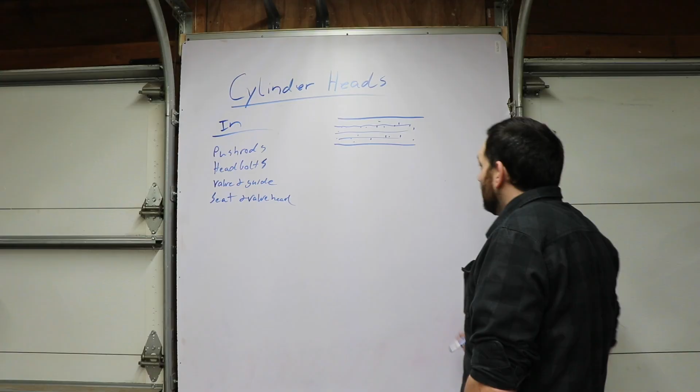But that's not how it's moving through our cylinder head. We've got all this stuff in the way. And in most cases, we've got a cylinder head that at the bare minimum needs to make a corner. It may not be completely 90 degrees, but the air, because it has mass, wants to crash into the back wall.

And the whole thing about me saying mass is inertia. An object in motion wants to stay in motion. The same thing applies to air, even though it's so thin you can swing your arm through it and hardly feel it.

But we're not talking about it as ambient when it's in an engine. When it's in an engine or flowing through an engine, because an engine is just a big air pump, it's moving very fast. And it's not just moving in one direction, because we've got a valve in here that's opening and closing. It's actually stopping flow and then letting it flow, and stopping flow and letting it flow. Well, all that air is moving and it hits the back of the valve and bounces off. So air isn't moving in a straight line through a tube as it goes through an engine.

It's actually moving forward and then backwards a little bit, and then forward and then backwards a little bit, and then forward. So basically, if you know electricity, direct current would be a straight line, but this back and forth that we're creating with the air pulses as air moves through an engine is more like AC current, because it's going in both directions.

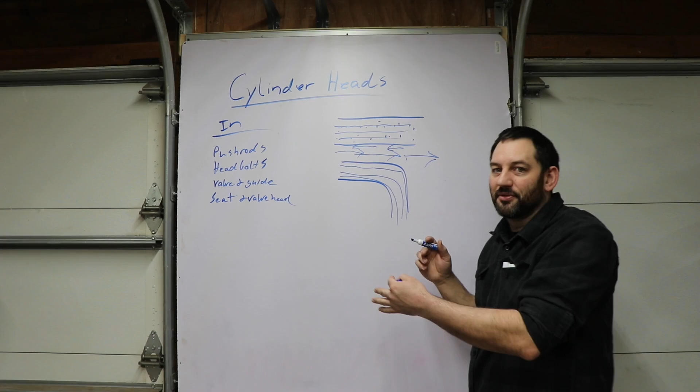We'll get into more of that in the technical side of it when we start talking about intake manifolds and some of the cylinder head porting classes and stuff like that. But it's something to bear in mind, that it's not just air going into an engine. There's everything all the way back to your throttle blade that matters about how this air acts as it's getting through your cylinder head. It's a little off topic, but it's something to be aware of.

Now in our example here, where we're turning the corner, we've got our fuel in here, but if this corner, aka the cylinder head, that's what's making it turn, is the shape of the cylinder head around here, isn't a good design, this fuel doesn't stay in suspension. And if it's way too fast, it'll actually just throw all the fuel against the backside and it'll puddle and turn back into a liquid instead of being atomized and just run to the cylinder.

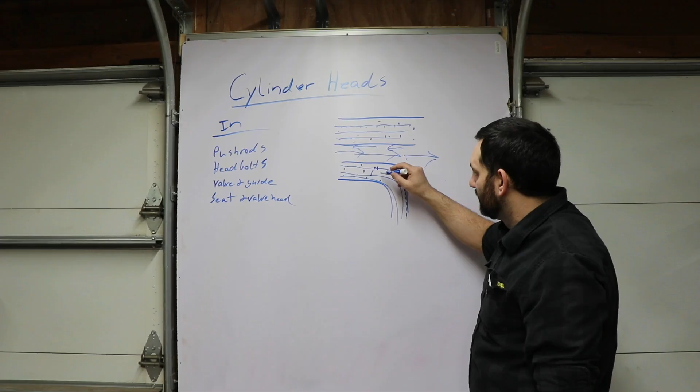The same thing can happen if it's too slow and it just falls out and dribbles down wherever. So we need to have a cylinder head design where everything stays as nice and atomized as possible to get it into our cylinder fully atomized and ready to burn.

Now with all these things in the way, if we've got our push rod holes, a head bolt hole, and finally getting to our valve, we need to have a port that gets through there. If we're looking at it from the top, we've got a pinch point here at our push rod that then has to negotiate around a head bolt hole and be able to get a port that gets to our valve. This is where these things being in the way comes into play.

Because now we're not only negotiating just a single turn from flange to cylinder, we're also adding several more turns depending on the cylinder head just to get the air to the valve, much less in the cylinder. And the more it turns, the lower the quality of the air getting to the cylinder is when there's more turns.

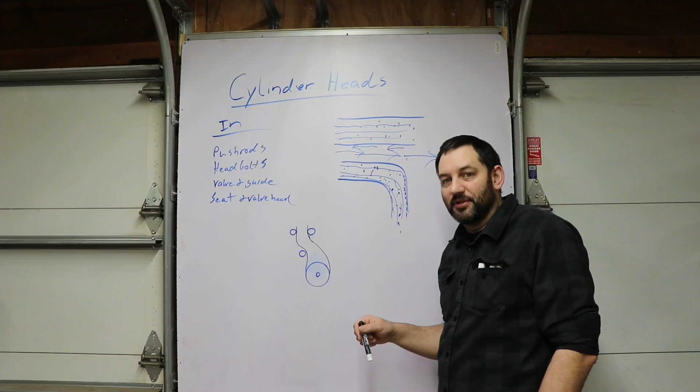It's not that it's bad, it's just that it's not as good as it could be because of your fuel being in there along with the air, and every time it turns, that's more opportunity for the fuel to fall out of suspension, or it slows down the air and it just doesn't end up being as good as it could be.

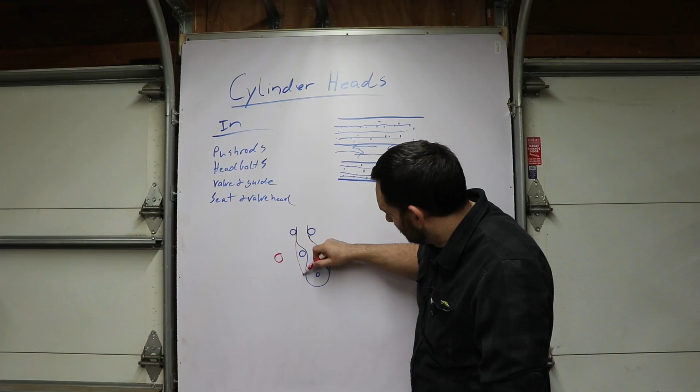For an example with what I just drew right here, if we had a port where, say, we didn't need to worry about this head bolt hole, let's say the head bolt holes were here and here, well, even if the push rod doesn't change, look how much straighter of a port we can suddenly make because that head bolt hole isn't there. The quality of air you're going to be able to get is going to be much higher, provided that the port that's actually in the cylinder head is of a good design.

But that's kind of the point, is that cylinder head designs are all different. They come in all shapes, sizes, flavors, all kinds of whatever. Especially in say a typical small block Chevy application, there's such a gigantic range of styles of cylinder heads to choose from that depending on your power goals, this is the type of stuff to start looking at.

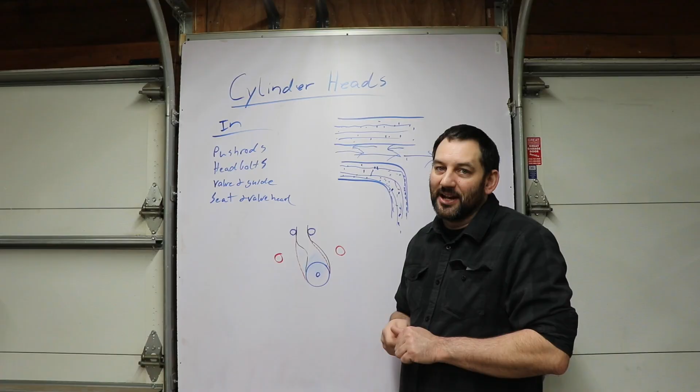Because as you move from an OEM cylinder head or even an OEM based design cylinder head into all of the aftermarket options, all of those aftermarket options are working towards making this air and fuel getting to the cylinder better. That's how they're making more power. And the designs can get crazier and crazier as you go, all the way up until it's something that isn't even remotely recognizable as a factory head, just because it's been changed so much in order to improve the quality of air getting to the cylinder.

Now take note that I keep saying the quality of the air getting to the cylinder. And that is because I'm not talking about raw airflow. Like the CFM that a head flows is not what we're talking about here. We're talking about the quality of the air. And that is referring to, we want the air to not be turbulent.

We want to make sure our fuel is fully atomized, or as close to it as we can get. And we don't want the air doing anything funky along the way inside of the cylinder head port or after it gets into the chamber. We want nice, smooth, consistent airflow, which is high quality air. If it's tumbling and doing all kinds of funky things, that's not high quality air getting in. So I just want to make that distinction, that it is different.

Now, if we're gonna compare some cylinder heads, like say you just got your catalog open looking at cylinder heads, most of the time they're gonna list it by intake CC. And what that's referring to is the cubic centimeters of displacement that the intake port is in size. This is really kind of a terrible way to compare cylinder heads unless they're all of the same design. Then it's a pretty decent way to tell the size of the cylinder head port.

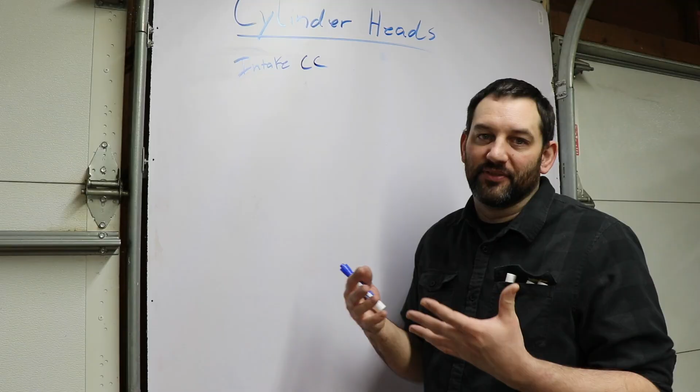What I mean by that is, let's say we've got a 23-degree typical small block Chevy. Well, if we're looking at a 185, a 195, a 200, a 215, we can pretty much easily go with the idea that the 185 is a pretty small port. It'll be good for a smaller engine or building torque on a larger engine at lower RPM.

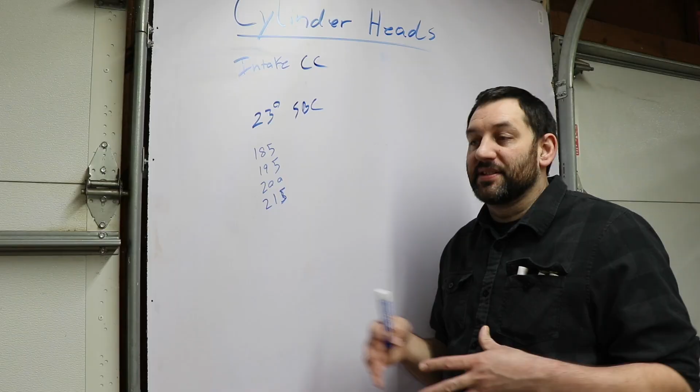And as we move up in port size, that port's going to get bigger, it's going to flow more air, but if we're not changing the size of our engine, the air is going to be flowing slower or have less pull on it because of the size of our engine. So if we're using our small port on a large engine, the engine's going to be making a bigger pull. That's going to have good high airspeed on a small port. It's going to make torque and it's going to make it at a lower RPM.

If we've got a small engine with the big cylinder head, so the complete opposite, it's making a small pull, which is not going to make a lot of airspeed, especially on a big port, until it gets high up in the RPM range to start making enough pull or pumping forces, because the engine's an air pump, to move enough air to create good airspeed in the cylinder head.

Now, this is important to understand because air has kind of a speed limit that it can get up against. It'll only go so fast, and then same thing with our atomized fuel being in there. There's a point where you need it fast enough to keep the fuel atomized, but then going too fast can also make the fuel fall out of suspension, because now it's got so much speed that we're literally just throwing it against the port wall when we try to make it go around a corner.

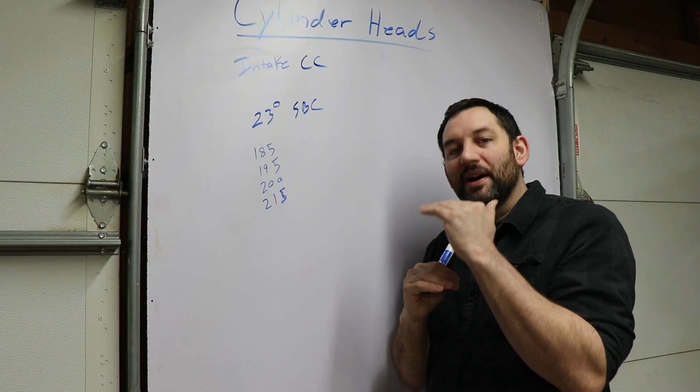And there's a sweet spot in there where heads make great power, regardless of what they're on, provided they're designed properly around your engine build. They'll make good power almost everywhere, kind of a thing. And it's hard to get in, say, an off-the-shelf as-cast situation. You either gotta have a ported cylinder head or something that's CNC'd, or just a head that's a really, really good design right off the bat in order to accomplish that.

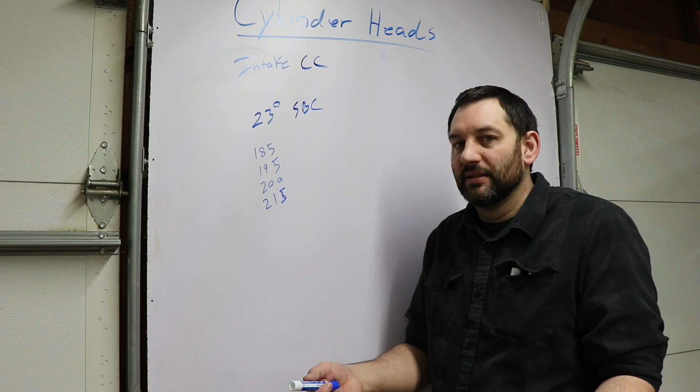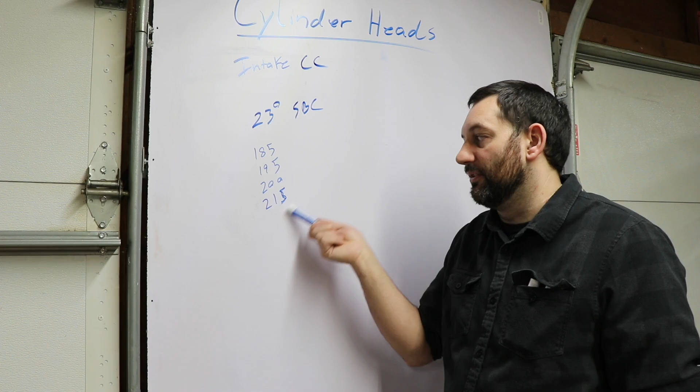But that's why cylinder head porting exists, is to alter the shape to help the air flow through the head past all of our restrictions and around the corners it needs to make. Getting back to port size here though, as long as we're comparing 23-degree heads that are all for the same application, this is an okay comparison using the intake CC. Just out of generalization, these are probably going to be as-cast sizes. Getting to a 215 might start to be a CNC'd port, where they started with the 185 head and then CNC'd it, and now the shape that they made is displacing 215 cc's.

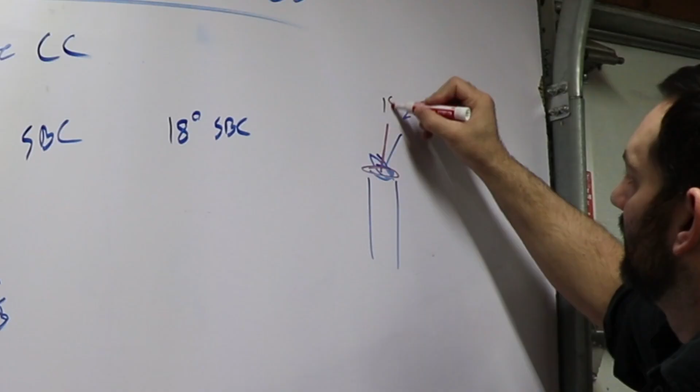The bad part is now if we're going to get into trying to compare it to, say, an 18-degree small block Chevy head, because this degree difference is referring to the valve angle. So our cylinder is straight up and down. We got our valve coming in at an angle. So a typical small block Chevy, that is 23 degrees. Now you go to an aftermarket head of an 18, and now that valve's a little flatter, and now it's at an 18-degree angle. And there's even lower angle numbers than this.

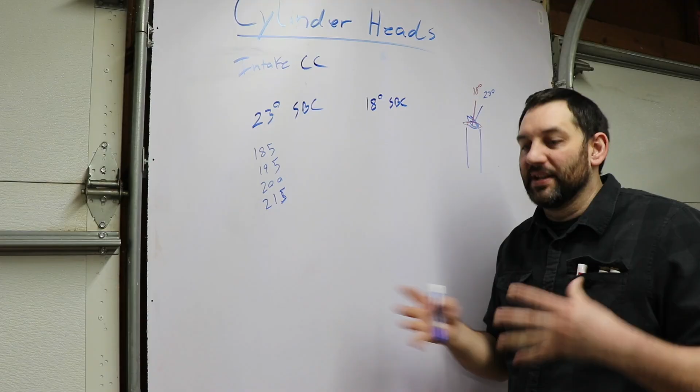The reasoning for that is they're changing the angle of the head because they're trying to work with the combustion chamber size to make it smaller. That's when you start getting into really high performance heads, where nothing other than your bolt holes and your push rods, and even the push rods are movable, is like everything's negotiable at that point as far as what is able to be moved around to improve a cylinder head.

But with the port CCs here, probably, because we're talking a high performance head here, this is probably going to start at say a 215, and have a 230, and maybe a 250, or whatever in port sizes. The actual numbers are not important for this discussion.

But this 215 and that 215 are not equal to each other. Not even close. So you can't compare this 215cc head to this 215cc head in terms of, oh, they're going to be exactly the same. No, they will not be the same. They're not even going to be close, because this head probably has a whole lot more done to it.

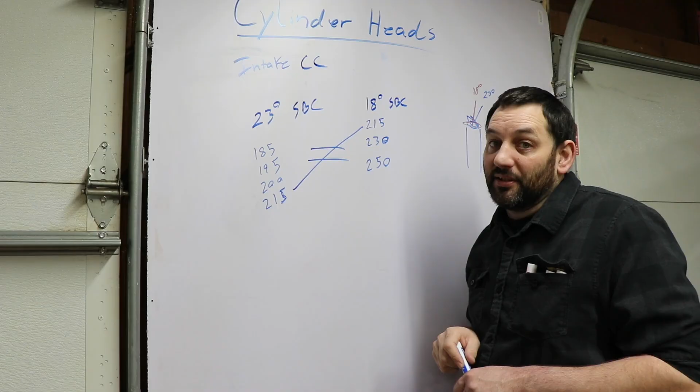It might have offset push rods. It probably has a smaller chamber. It most likely has a raised runner, which, you know, if we're talking, we've got our chamber and our valve coming off, and we get our port drawn in here over to the intake flange.

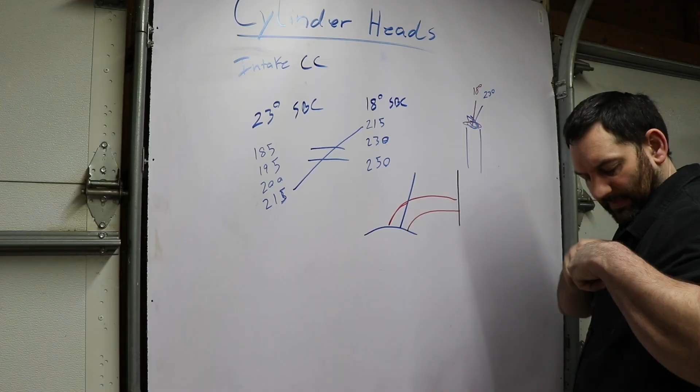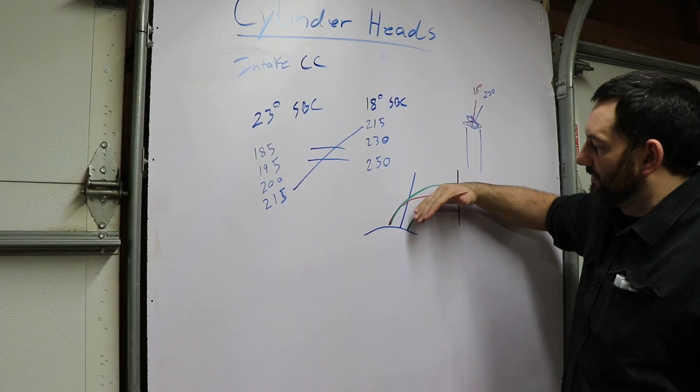Now you might have a typical port that's going to be kind of some shape like that, but a raised runner port is going to be moving that intake runner opening at the intake flange up. And even if the valve angle doesn't change or anything else like that, you can see we've reduced the amount of turn in the cylinder head.

So even if these two ports are the same size, the air quality being flowed through them is going to be different. And because this one is up higher, it's automatically going to make our raised runner bigger.

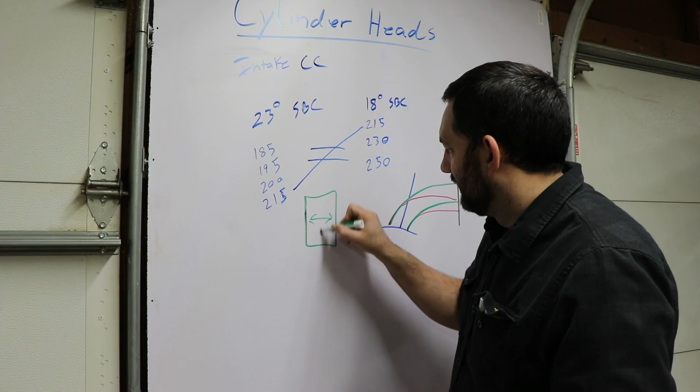So really, if we look at the cross section, being if you're looking at it from the intake flange, is the area of the inside of this port. So if we got 1 by 2, we've got 2 square inches. I think that would be our cross section.

And if our two ports are the same size, the cross section won't be the same between them, because some distance or volume needs to be taken up with this port being raised. So the cross section of that raised port is going to be smaller, and that's going to make the airspeed higher in it, which is actually going to act a little bit more like one of these smaller heads.

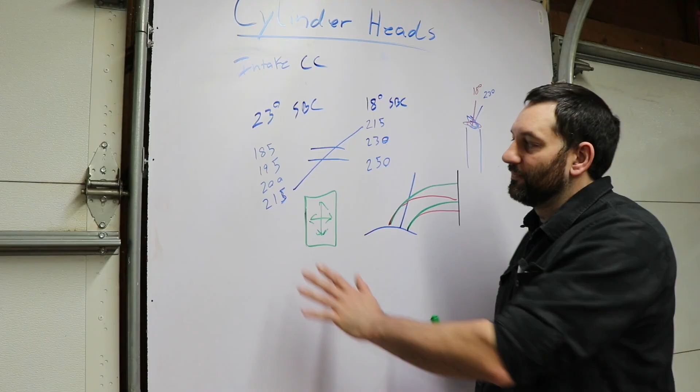So really the point here is that this is not an apples to apples comparison. You can use it for a base level comparison as long as the cylinder head type is exactly the same.

Now I could keep diving into the shape of the intake port and all that stuff, but for 95% of you, it's not going to be an important thing, because you're going to have an engine and it's like, this is the type of cylinder head that we have to work with, and you're not going to be able to kind of go a la carte with the cylinder head and pick and choose every little detail about it. A good example of that: anybody building something for the street, typically even on the small block Chevy side, you've got all those race head options, but you're probably going to end up just picking a 23-degree head anyway, because there's a lot of really good options out there, and you don't need a full-on custom race head for a street application.

We will be getting into more of the technical side of that stuff in some of the cylinder head porting videos that'll be coming up. I don't want to turn this into a 3-hour video.

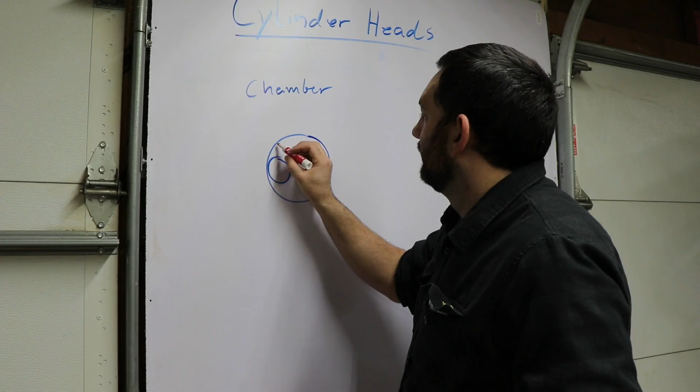So once our air gets to our chamber, we've got several different ways that the chamber can be designed. It could just be a big open bowl with a couple of valves in it. We could have something that just has a couple of flats. All the way to having our kidney bean or peanut shape in there, where we've got material added in to try to make as small of a chamber as possible.

And a lot of that is just going to be based around what fits, what works, and the chamber size that we're shooting for, because a smaller chamber—again, it's measured in cc's—a small chamber is going to be higher compression, because as the piston comes up, you're squeezing that air into a smaller space. And an open chamber is going to be lower compression.

Really, the shape is less about performance and more about making the compression ratio you want for that engine. You could buy, for example, a 75cc chamber, that's a fairly big one, or you could buy a 64cc chamber, which would be making it smaller, making higher compression. Sometimes that's determined with the head, and a lot of times it's also determined with the piston, because we'll use the cylinder head to make our airflow better in a performance application.

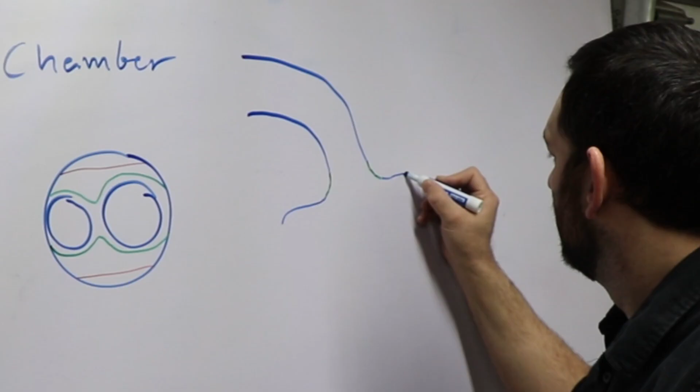Where that comes into play is when we start talking about how the air is coming out of our port and into our chamber. So if we've got our port, and then we're going to have our valve seat. And if we just have a really flat chamber, this would be a typical small block Chevy where it's got a lot more chamber on one side. That's due to the valve angle, like we were talking about earlier. So the more that this valve gets stood up, the smaller the space can be made over here.

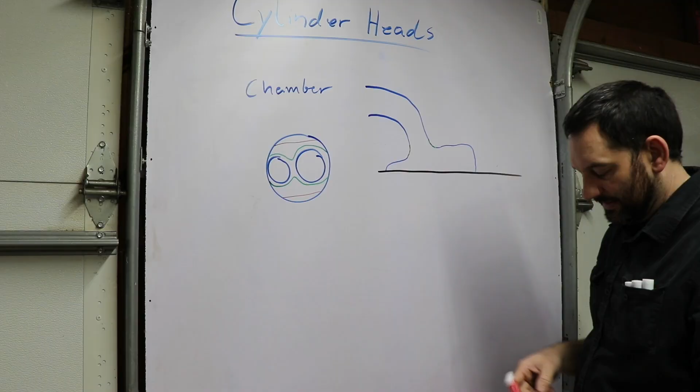Now when you get into performance applications, this air, like I said, doesn't want to turn corners, so it's got to turn a lot to try to fill in these areas. And that can cause turbulence where the air starts coming in, and it's so far that it kind of ends up being turbulent just to fill those areas.

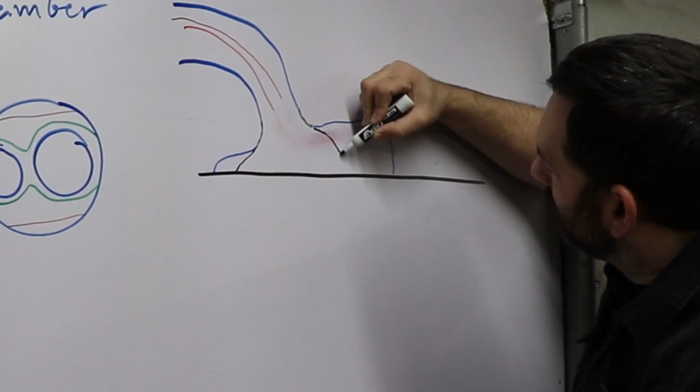Now in order to fix that, some cylinder heads will change the shape. Where we come off our seat, our chamber starts looking like that, where now we've eliminated all of this void over here, and the chamber is a lot smaller. So this would be getting into our peanut, kidney bean shape.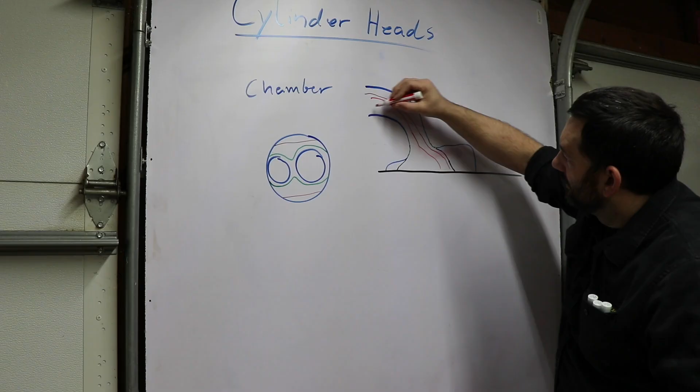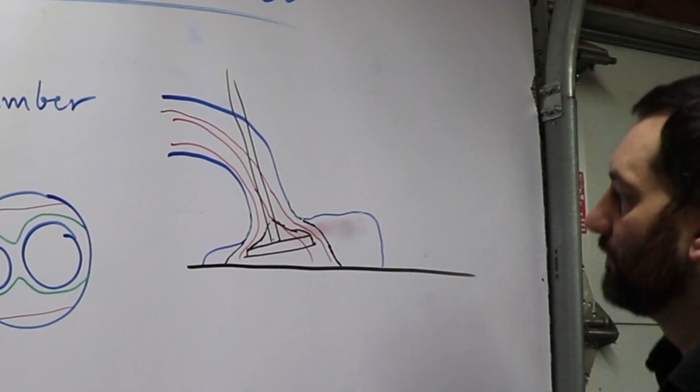And now when our air comes into the cylinder, it is supported the whole way, so it can flow nice and smooth around the valve. Because yes, we still have our valve in here, so it's got to get around. Same thing, the back of the valve is shaped in a way to support that air also, where it'll flow nice and smooth around each side. So with all of those things, we're improving the quality of the air.

The other thing is, as we're transitioning from this super flat to this steeper edge along the valve, our valve angle, or valve seat angle, can get steeper. So 45 is the typical all-arounder valve seat angle. That'd be where it seats on this valve against the head.

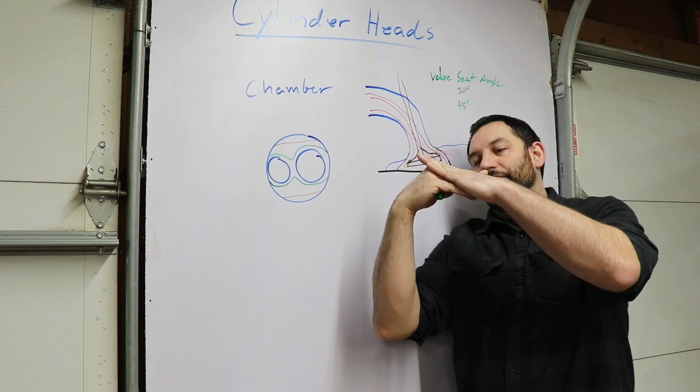Now, when you've got a super flat style chamber, typically a 30-degree seat might be better set up for that head. Some OEMs ran 30-degree intake seats back in the day, and the 30-degree seat makes more airflow at a lower valve lift because at the flatter angle, for a given amount of valve lift, the space in between is greater.

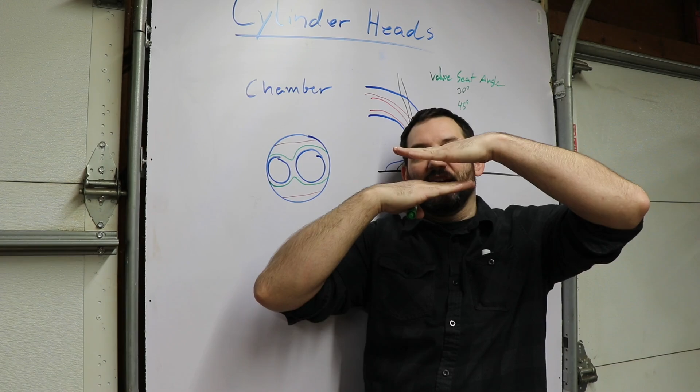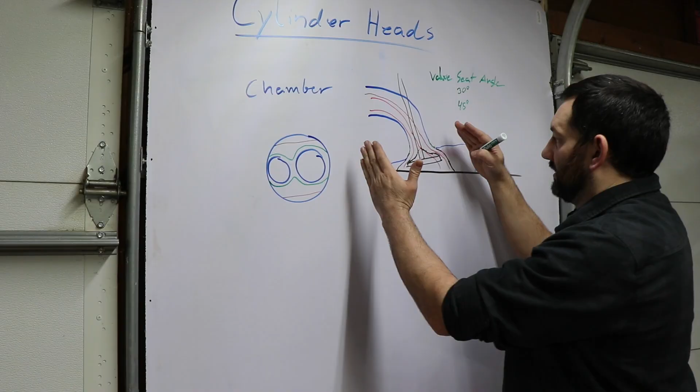And I know that sounds weird because, well, if it's lifting 100 thou, it's lifting 100 thou. Yes, but if you're looking flat to flat and we lift 100 thou, we've got 100 thou of space. But if we're at 45 and we lift 100 thou, we've got 100 thou between here, but that doesn't mean we've got 100 thou between everything else, because we've got the port, the chamber, the valve, and everything else in the way. The valve didn't just magically shrink 100 thou all the way around. It only went in a linear direction.

So you can flow more air with a smaller seat angle at low valve lifts. The problem is by the time you hit a quarter inch, or 250 lift, it stops being better, and a 45 will start to flow more air than the 30 at a higher valve lift, because the angle is softer and it's making that air turn less.

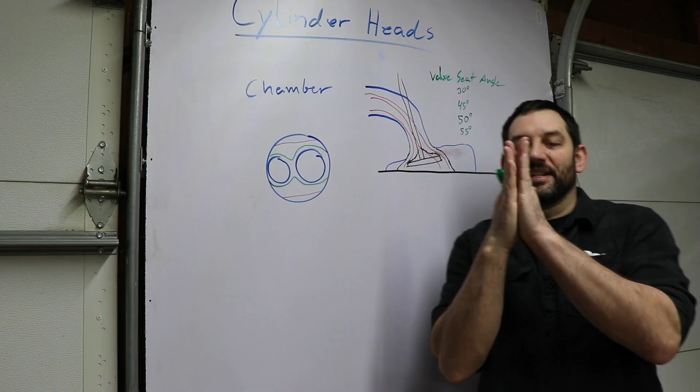That being said, the farther we go with using our chamber to support our airflow, we start getting into where a 50-degree seat might be a good option, especially if we're talking high valve lifts. I haven't personally used one, but I have seen seat cutters for a 55, and I think that's kind of about maxed out, because you also get to the point where if it's too steep, if it was 90 degrees, you're not sealing anything with the valve because it can't put any pressure on. So this is kind of an upper limit. It's definitely not very common to go past 50.

But the 50 also gives up more at the lower lifts. So if we just had a stock cam in something where we see 450 of valve lift,

a 50-degree seat is not a good option for that, because it's only going to start trying to work above that. A 30-degree would probably be pretty decent. It's just, you're also talking a really bad port design where everything's really sharp corners and the air has to slow down a lot so that it can turn around all those corners.

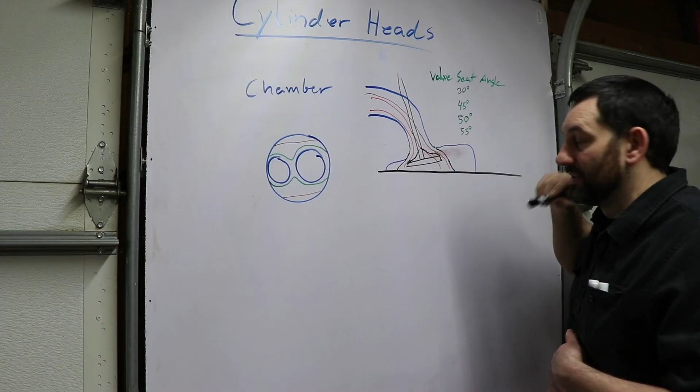45 is kind of the go-to all-arounder, because it doesn't give up a whole lot compared to the 30 at low lift, and it doesn't fall on its face at high lift like the 30 does. A 45-degree seat angle is what almost every head's really going to come with, unless you're talking about a much higher end race style head.

Now, much like the ports themselves, with the chamber, it's kind of sky's the limit. You can do a little bit of anything and everything if you're blank sheet on a head.

So instead of our valve seat being here, we can cut it deeper into the head. That moves our valves up, adding cc to the chamber, because your valve height absolutely has a big effect on that.

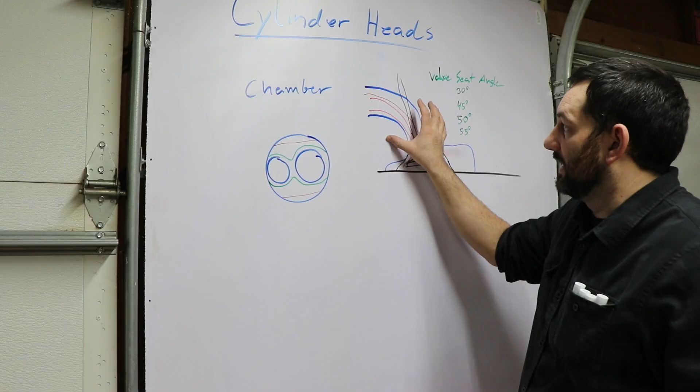Or we go to a closed chamber style head, but if we're already talking a raised runner head, perhaps we need to meet the same compression ratio, so the entire thing got moved deeper into the head and the port went up with it, in which case now we've got a larger volume out here, even though we've got a closed chamber head with our tighter shape. You know, everything can change a little bit.

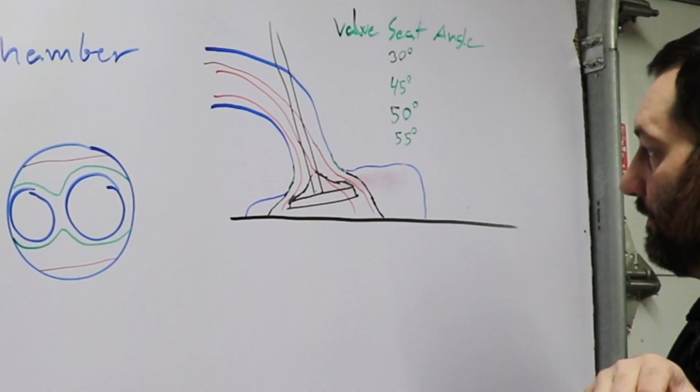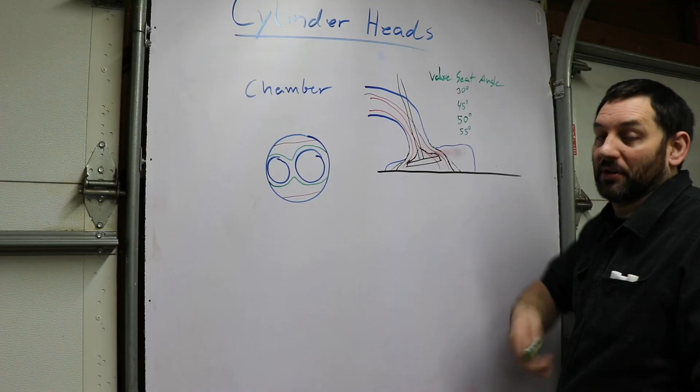It can also, well, if we need to lower compression ratio, but we've got a closed chamber head with this tight support area, well, we could come back and lay this chamber back a little bit more, just to add a little more cc if need be, and that can be done with just porting techniques and grinding on the cylinder head or getting it CNC'd to a different shape.

Anything and everything can be changed here and adjusted, and it's just whether or not you want to get into that much nitty-gritty of it, or if you're buying an aftermarket head anyway, just pick the right one for the application. I can't tell you what's the right answer for that, because it's going to be a little bit different for every type of engine build.

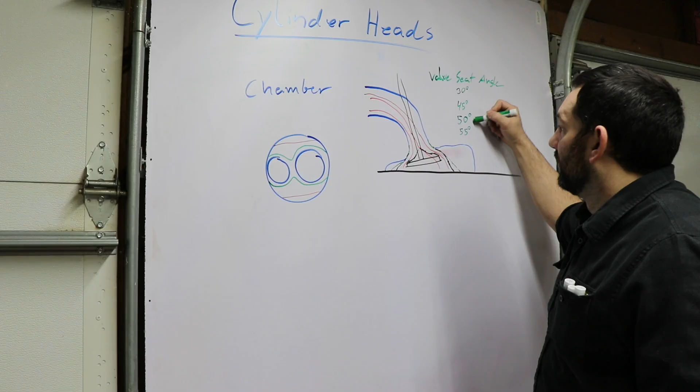But if we're talking high performance engine build, which is why you're watching this video, we're gonna want to stay away from a big wide open chamber unless we have to for the compression ratio. We're gonna want to have more of a closed kidney bean shaped chamber if we can, and that'll get us that airflow support we're after for having either a 45 or maybe even a 50-degree valve seat angle, so that we know we have a good port, we've got a good chamber, it's just a good cylinder head all around to make higher compression, large cams, big intakes all work together.

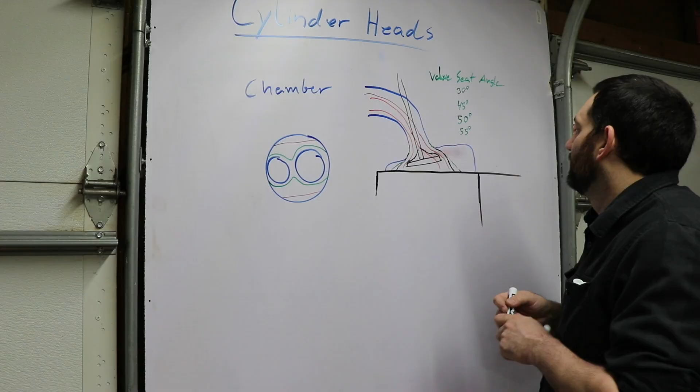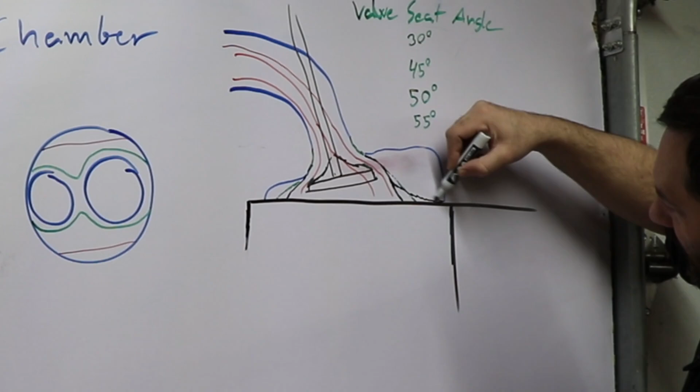For the nitrous guys, there's something that, if needed, can be done, and that is chamber softening, where we actually turn it into an open chamber, but we're not doing it like this. We're keeping a lot of our shape, but then we'll lay this edge back on both sides, and that's just to eliminate the sharp corner on each end where our chamber meets the deck, because all of this otherwise should be flat area.

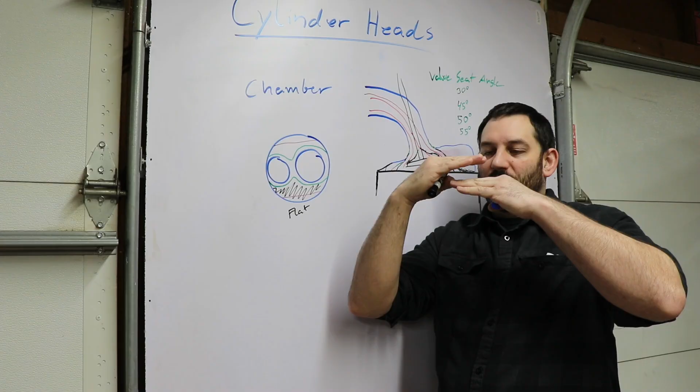And it's flat because where the flats meet up with our piston when it comes up is called quench. When the engine is running, that becomes a very, very small gap. And the idea here is that we're making it so small that the air and fuel has to be thrown back into the center because we're pinching it so tight.

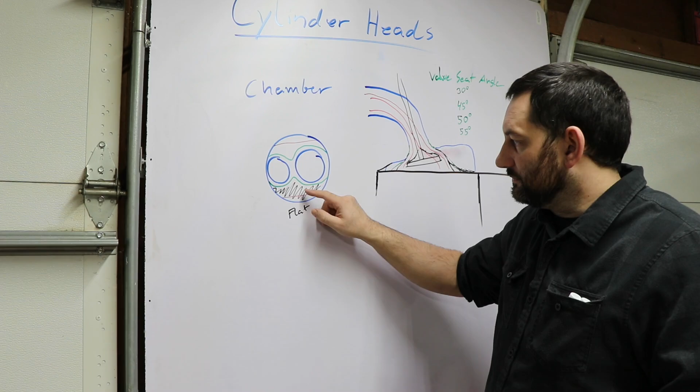In a nitrous application, depending on what air and fuel gets stuck in there, it can make a detonation area if we got a sharp corner. So in some applications where that's needed, we end up doing this chamber softening so that there are no sharp corners, and it all just more can get funneled back into the middle, but then we lose the quench area.

Quench area is really just trying to take that portion of the cylinder and throw everything back in and kind of pretend it's not there, making it seem like the whole thing is just a little bit smaller.

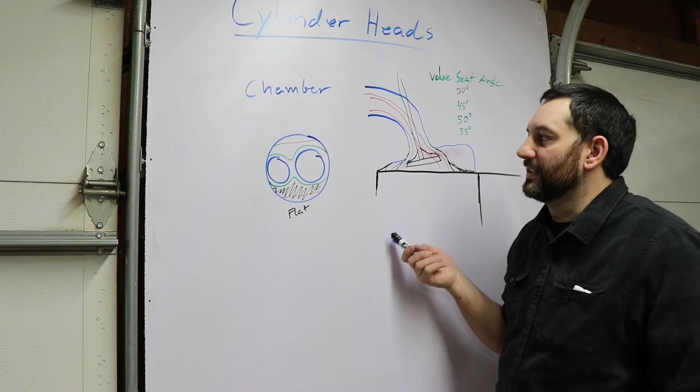There's plenty of discussion and argument about whether you even need it, what size it should be. Honestly, for the average person, you don't really need to worry about it. Just as long as you're not too tight of a gap where you're having contact between the piston and the head. Once it's past a certain point in size of that gap, it just loses a little bit of a benefit. You're not really hurting anything. So really you shouldn't be too worried about any of that, and I've never done any dyno testing where we can go back to back testing the importance and the power production of quench.

Just something to know - most cylinder heads are going to be designed with some type of quench as a factor between the piston and the head, just because they're making the shape to work with the airflow and just leaving everything else flat.

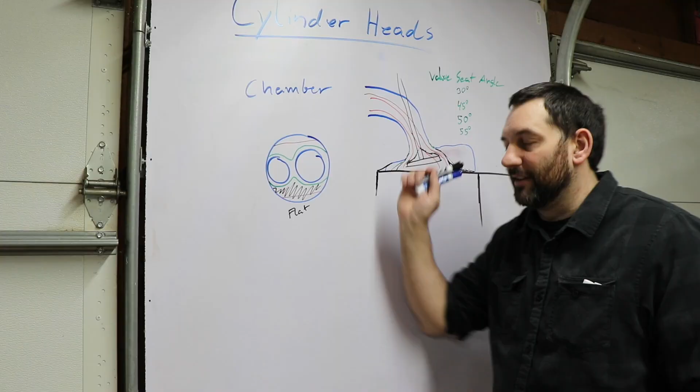Now, I feel like we do need to touch on a Hemi, and I mean a proper old school Hemi, not a newer semi-Hemi. The combustion chamber is legitimately almost a complete upside down bowl shape in a Hemi.

The benefit of which is I can put really big valves in them. Because instead of being limited to just the shape of the circle, they've tipped it back and created enough space to put this very large valve in. It also has a secondary benefit of the ports becoming very straight.

So old school Hemis flow huge amounts of air. That's why they're on all the top fuel dragsters with big blowers, because those guys are at the point in engine building where as much as you can cram in, it'll take.

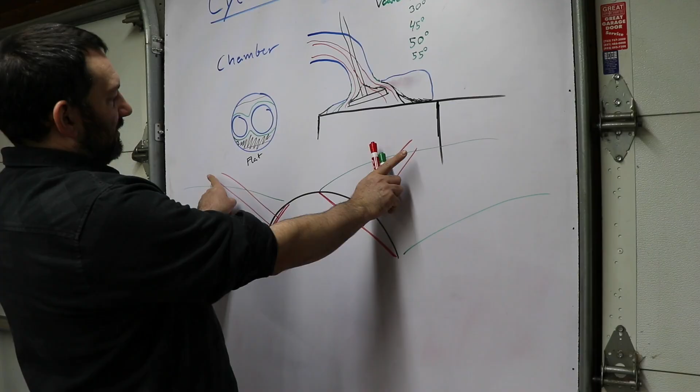The other part is when you look at the way everything's arranged, you start talking about a very wide head, very big rocker arm system to get everything to work. There's a lot of just requirements that go along with the design that make it expensive as well.

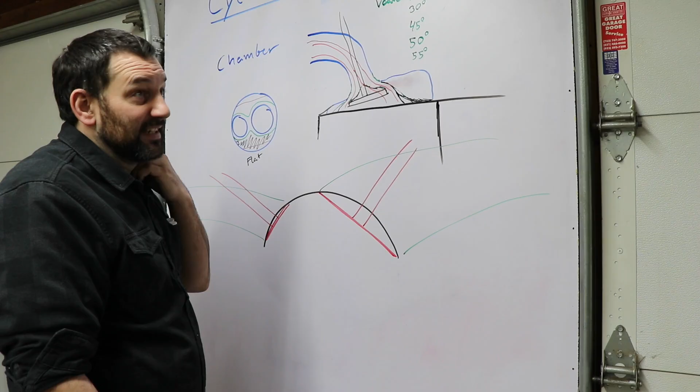If you ever looked at the price of Hemi parts, valve train parts compared to a regular old inline V8, like the rocker arm system is at least 4 times - no, it's got to be more than that - 7-8 times more expensive for rockers, just because of the sheer size of everything. It's just so much bigger.

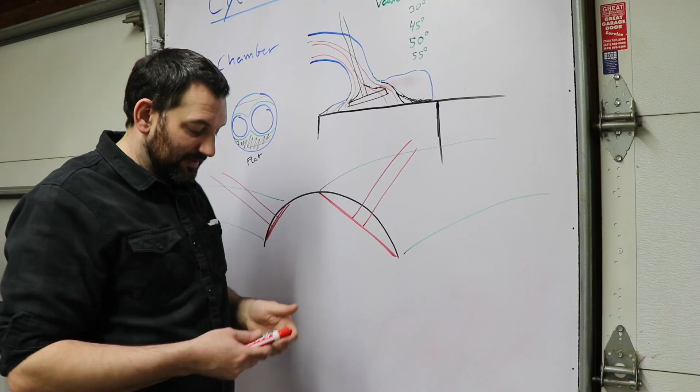Now I bring up the Hemi in this situation because of this super nice port shape. So if you're thinking ahead a little bit, like, well, why don't we just take that port and put it on our inline head? And yeah, that's a great idea, because now we are changing our port into something like that. However, as you can see, we are now way, way higher where our intake manifold begins than we were. So if we're talking about anything that needs hood clearance, it's kind of a, nah, I can't do it.

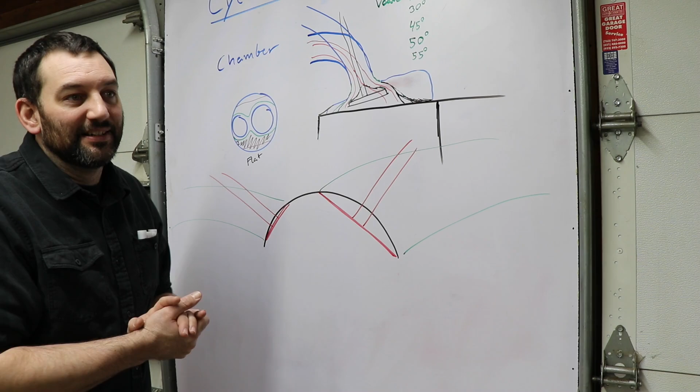I will say the flip side to this is going to be the newer GM LT series. They've got really tall, straight runners. But if you look at that cylinder head compared to an old small block Chevy, they're huge. It's a huge cylinder head compared to a 23-degree small block Chevy head. It is so far different, but it's also very much a high performance, almost race quality level head from the factory right out of the box kind of a thing.

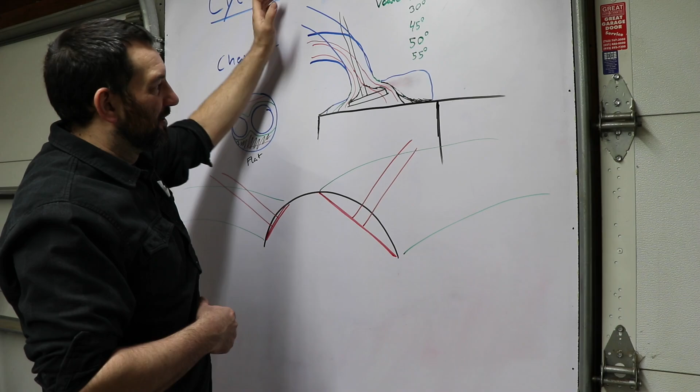It also comes into hood clearance issues, so the intake manifold's got to be a lot different. From what I've seen with a lot of the LT stuff, we're working with superchargers, so the supercharger can be stuck down in there. You can compromise a ton on the intake manifold itself just because you've got a supercharger making boost, and you're forcing the air in. It can be kind of garbage everywhere past here, and as long as this part is pretty good, it'll fix a lot of the air on the way into the cylinder, and it still makes power. But we're talking compromises again.

So how do you choose the right cylinder head for your build? Well, this is one of the things where there's no right answer for everyone, but we can make some generalizations to help us narrow down the window to maybe pick from a few different ones.

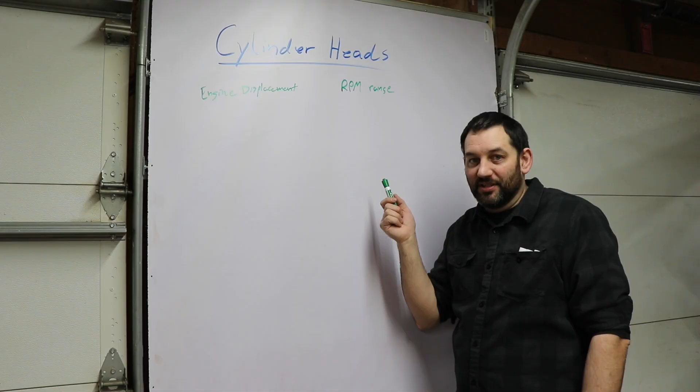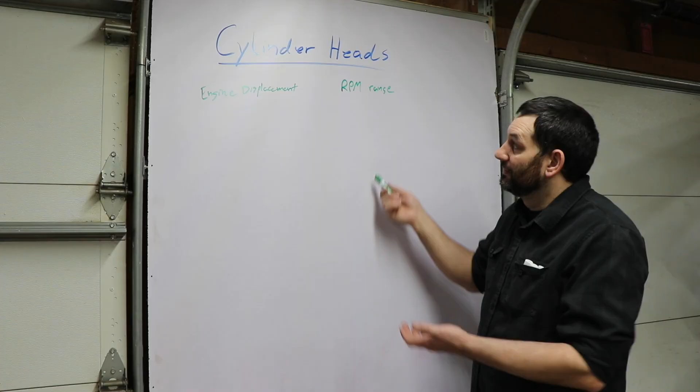What's going to play in is engine displacement. This is going to be the big one, because the bigger the engine, the bigger the cylinder head you can run and still have it work good in a certain RPM range, which leads us to RPM. Are we building a race engine that's going to turn 7,500, 8,000 RPM? Or are we building a street engine that's going to turn 6,000? Are we trying to build a tow rig engine and we don't care what it does above 5,000? That's going to play a big factor, because the race engine versus the tow rig engine are going to be wildly different cylinder head choices.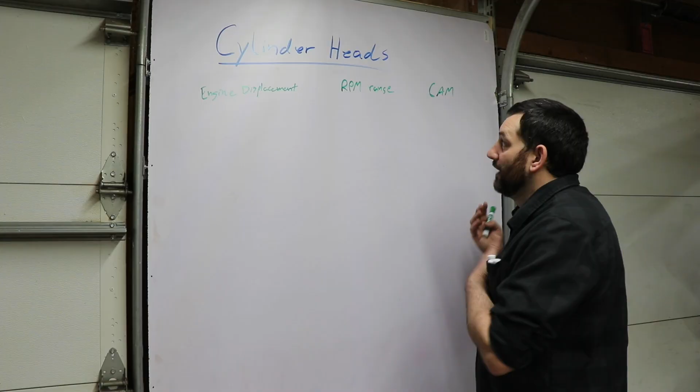And another is our cam. Really the cam and the head should kind of be, I don't know, it's like which one do you put first? I'd say we're probably picking the cylinder head based on our engine displacement and RPM goals, and then we'll pick a cam to go with it, but we can't just pick a cylinder head without thinking about our cam as well.

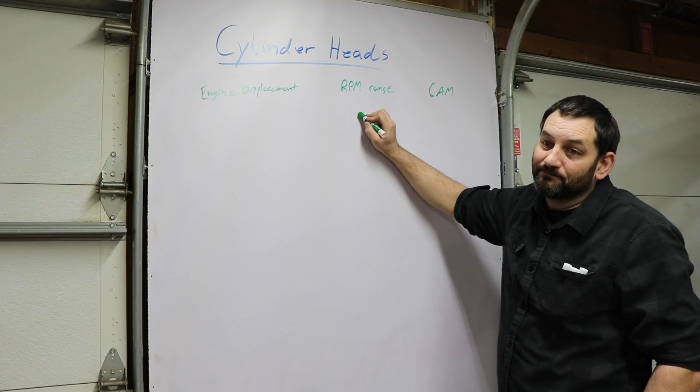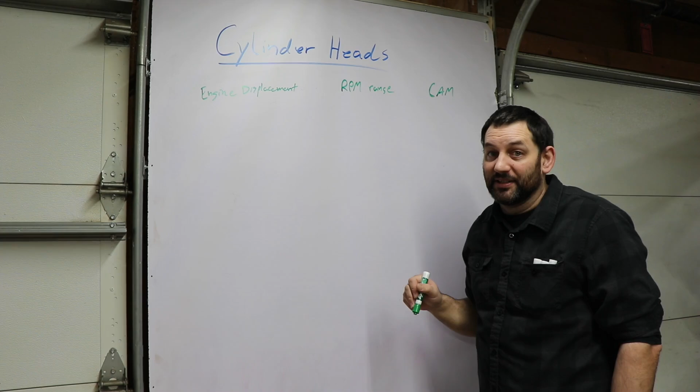Simply because our camshaft might have lift requirements. If we're going for big RPM, there's a lot of different styles of cylinder heads that can get us there, but if we're needing say an 800 lift cam to do it, we're going to need a cylinder head that can actually do 800 worth of lift. Versus if we're doing a street engine and we keep our lift under 600, that's got longevity. Most any cylinder head can be made to handle 600 lift, and we don't have to worry about picking a special head because of the cam requirements.

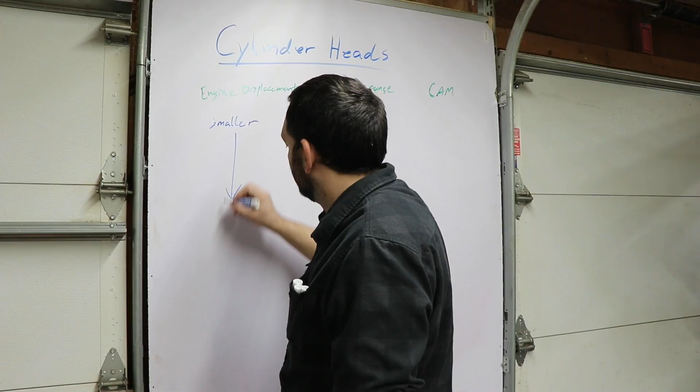Now when it comes to the engine displacement, we're smaller to larger. That's kind of going to be in line with the port sizing of our cylinder head. I say port sizing because it doesn't matter the actual physical cylinder head size or design, it's going to come down to port sizing. Like we touched on earlier, smaller engine displacement has less of a pull, bigger engine's going to have a bigger pull. So a bigger pull can make use of a larger cylinder head port and get the airspeed into the window where it's good at making power.

That gets us to our RPM, so a low to high RPM, kind of the same thing. The lower the RPM range, the smaller the cylinder head port size we're going to want to work with. The higher the RPM, we can use a larger port, but if we have a small engine and high RPM, we still don't want to go with a giant port, because we're probably never going to actually reach the RPM where we'll get our small engine to make enough airflow to get the airspeed into the good window in the cylinder head.

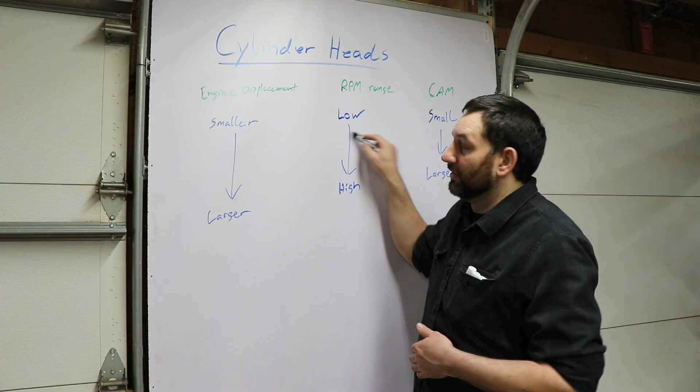And I could get away with a little more camshaft to cheat the power up a bit, even though I don't necessarily have the cylinder head to go to high RPM. But since I'm building a street engine and I'm okay with a lower RPM setup, I can put a little more cam at it. Even though the cam will be limited by the cylinder head and we won't make more RPM, we'll still add some airflow and build more power in the mid-range.

Flip side of that would be building a small block Chevy, where we've got any cylinder head possible to choose from. Really, it comes down to goals and budget, just like we talked about in the very first introductory class video.

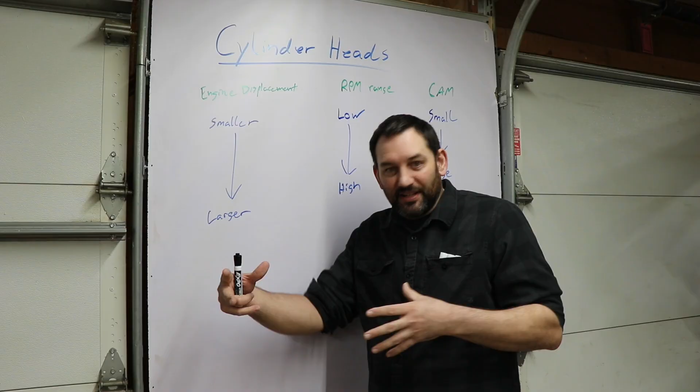If you want to make 500 horsepower, you can do that with a 23 degree head, an 18 degree head, a 14 degree head, a bore-rotated splayed valve race head — anything is capable of it at that point. But the 23 degree head is the budget option, and there are a ton of options even within that category.

Then you come down to: what engine size are we going to do that with? Because 500 horse is pretty easy to do. We could do that with a 327, or we could do it with a 427. The 427 will obviously do it much easier because of the additional displacement.

And they could even probably have the same camshaft at that point in time. It's just because our cam is going to act bigger on the smaller engine and it's going to act smaller on the larger engine. But between the cylinder head and the cam, airflow wise, we're getting to that point where we can make that power, and the engine displacement at that point is just deciding at what RPM we're doing it.

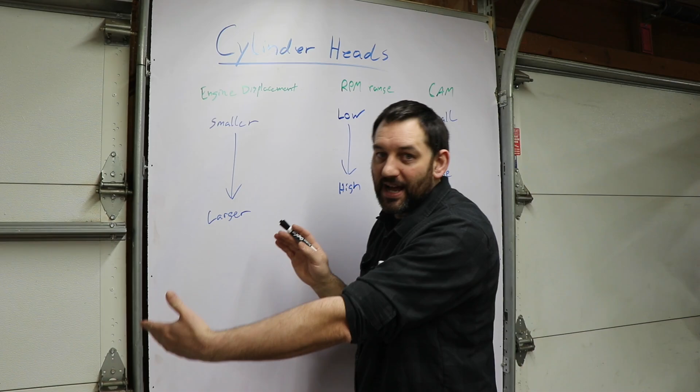But we've got our smaller engine and we don't have the big displacement to lean on or use as kind of a cheat code, then we need to make sure that we're not picking a giant cylinder head to go with it. That's only going to start making power on that little engine at a high RPM, because that's not where we're actually wanting to use the engine. So we're going to need to pick on the smaller side of cylinder head to go with our smaller engine.

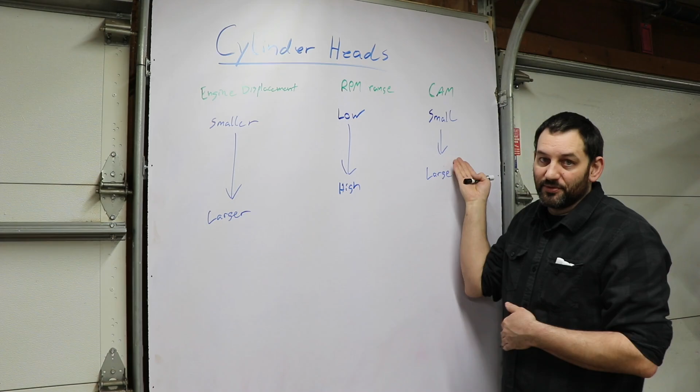And if we've got those two things lined up pretty well, we can actually cheat up our power a little bit by putting a larger cam in it, because we're getting that cylinder head into our airspeed range for our smaller engine in the RPM window we want. And then therefore we can use our cam to cheat up the amount of air getting into the engine and make a little more mid-range and top-end power, even though we've kind of compromised a little bit.

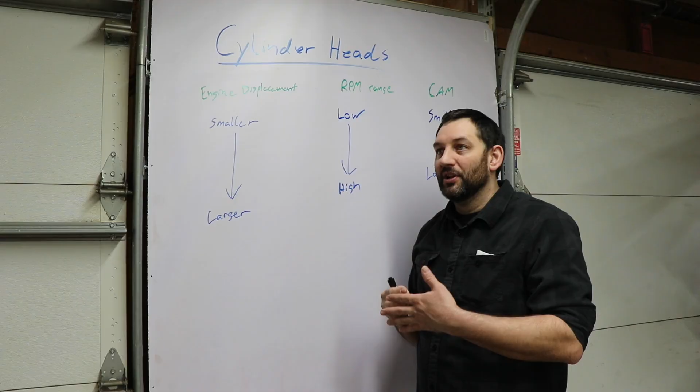But we didn't compromise, because we picked things that worked together, and therefore the engine will perform in a way that's kind of a little bit above and beyond, or hitting a little bit above its weight class, just because we're making all the parts work together.

Once again, we're going to dive way more into the nitty-gritty of cylinder heads when we get into the porting videos. I don't want this to be a 4 or 5 hour video, because there's going to be so much discussion on the little nitty-gritty bits of a cylinder head, and I wanted this to be more of a generalization for cylinder heads and choosing them, because we're going to get into intake manifolds and headers.

And I think at the end of that video, we're going to kind of tie everything back in, because your induction system, which would be everything from the throttle body or throttle blade in the carburetor to the cylinder, is your induction side. And then we've got the exhaust side, which is going to be everything from the cylinder out the tailpipe, so to speak.

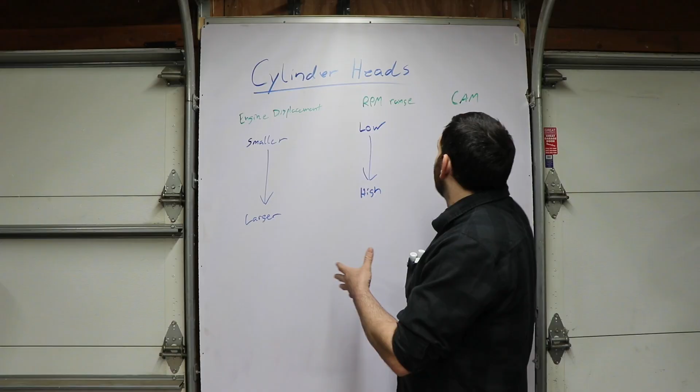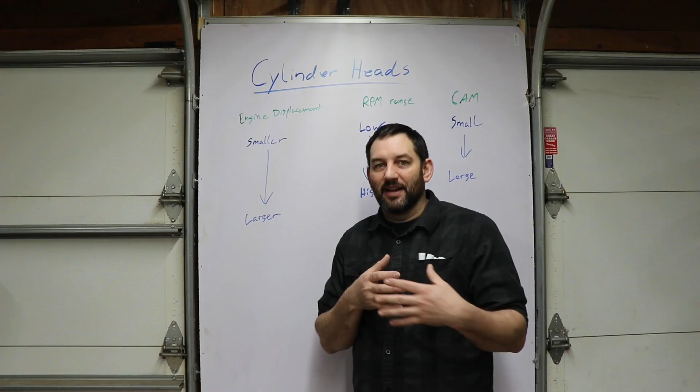And your camshaft, again, plays into this as well. But all of those things need to work together to build a really great engine. If you mismatch components anywhere along the way there, you can screw them up badly enough with mismatch that the engine will not perform well at all. But you can also get them pretty easily into a window where they're all going to kind of work together, and it'll make a really good engine.

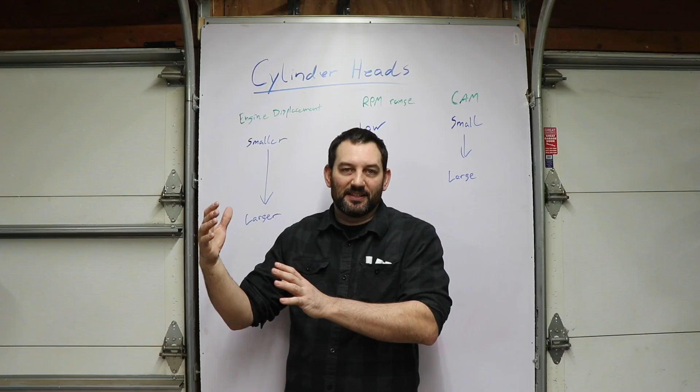And then if you really science it out and you're going for a specific use case, you can actually pick components where they work together so well that it just really outdoes itself compared to what you might look like it should be doing. And that's really cool, I like getting into that stuff, but we need to move past just the cylinder head. We got to talk about those other components first to really discuss how to make all that stuff work together. So, upcoming videos for that.